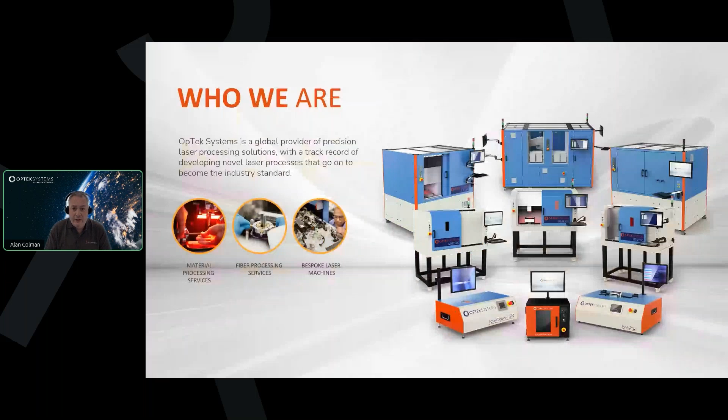As always, let me give you a quick overview of OpTek for anyone joining us for the first time. We are a global provider of precision laser processing solutions, headquartered in Abingdon, Oxfordshire, with international operations in Greenville, South Carolina, Boston, and Dongguan, China. Abingdon is where our machine builds, micromachining, and R&D activity is centered, and Greenville is home to our fiber center of excellence. Out of Abingdon, we develop and deliver custom laser processors and systems capable of machining a remarkable breadth of materials: ceramics, polymers, delicate organics, and much more. If a material can be machined, there's a good chance we have done it.

Our origins are in optical fiber processing, end-face machining, cladding removal, and precision tasks that improve yield and optical performance. But our capabilities now span way beyond that. We support customers across the full life cycle of laser processing, from early R&D and prototyping right through to fully automated production systems. Working routinely at sub 300 micron feature sizes, our systems range from compact desktop units to multi-ton, multi-laser 5-axis platforms. The largest we've built weighs several tons and achieves sub-micron precision.

Our Greenville site serves as the fiber center of excellence, focused on advanced fiber optic processing and assembly: stripping, cleaving, lensing, splicing, and the fabrication and alignment of fiber arrays. We work across telecom, medical, defense, and sensing markets and provide system integration, training, and technical support for our North American customers. As part of the Humanetics Group, we have the financial strength to take on ambitious long-term projects. We hold 9001, 14001 certifications across our sites, and ISO 13485 for medical applications in our UK and China facilities, reflecting our ongoing commitment to quality and sustainability.

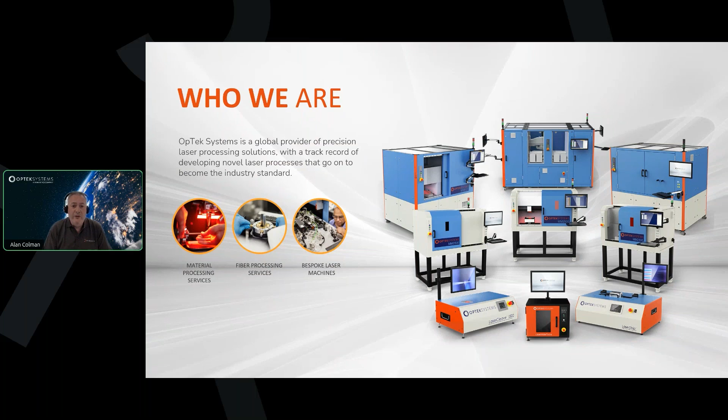Thank you, Alan. So a little bit about myself before we really get into the meat of today's discussion. As Alan introduced me, my name is Andrew. I'm an applications engineer at OpTek Systems here in Greenville, South Carolina. I got my start here specifically at OpTek in 2022. However, I've been pretty deep-rooted into the laser machining industry for a while now, making my start originally with Clemson University's laser laboratories. I've been working here with OpTek Systems, gaining my knowledge and applying my background and experiences in order to serve the biomedical, communications, aerospace, and defense industries, as well as many other industrial sectors throughout the world.

The main thing that we want to start today is really to first introduce our challenge. The main thing that we're looking at is contact-based mechanical milling, especially at the micron scale. This obviously, with anything, but specifically on this topic, introduces a lot of challenges. A lot of the drilling and milling bits at the micron scale tend to wear out very fast and are very susceptible to deformation and wear, and they often break even with regular trained use.

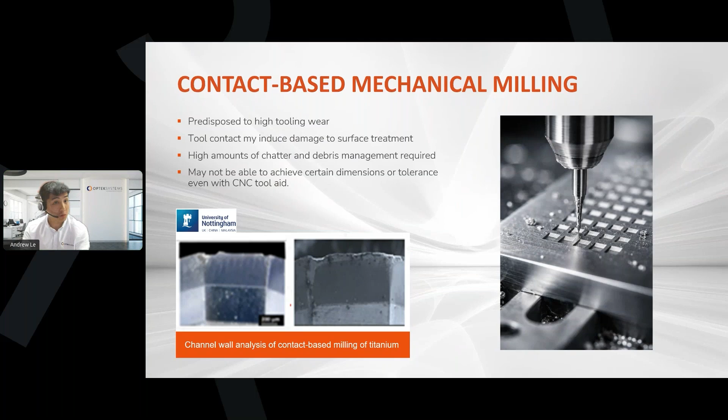Which pretty much moves us straight into our primary topic for the day: laser machining of hardened, be it inherent or surface treated, materials. Micromachining with lasers specifically has many advantages, especially as it relates to high Shore hardness rated materials. It's entirely light energy based, which means it's entirely contact free. The use of galvanometric mirror systems means we have high speed, high volume output of our working materials and conditions.

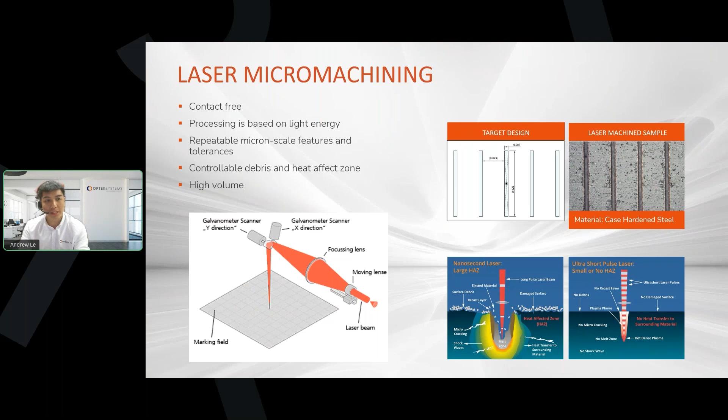For our first example of a real-world application of laser micromachining for hardened materials, we're looking at a gas pneumatic bearing or hydrodynamic bearing. These systems are usually made up, in this case, of shafts of molybdenum, but also titanium and case-hardened steel. Often these systems require very specific machining with very high, low tolerance requirements for the patterns and groovings. This means they have to be repeatedly produced, and we have to make sure we're doing it as consistently and verifiably as possible.

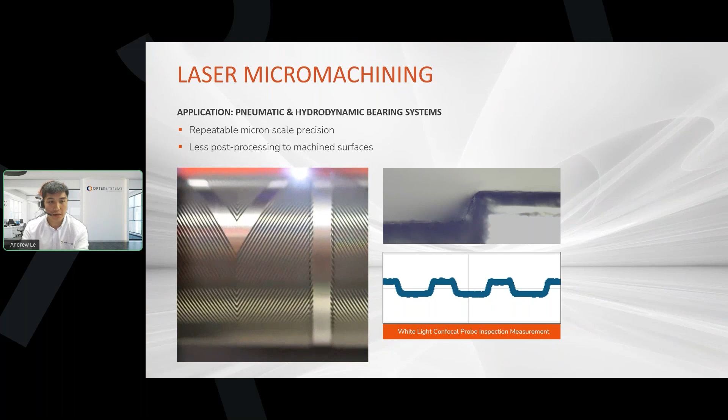What we see here is that OpTek's laser applications labs are able to integrate coordinated motion systems. In this case, both linear drive systems and rotary systems in combination with our galvanometric scanners. This gets us a high amount of controllability with what we're marking, as well as the ability, as we can see in the bottom right corner, to use inspection tools to verify and certify the quality of our work.

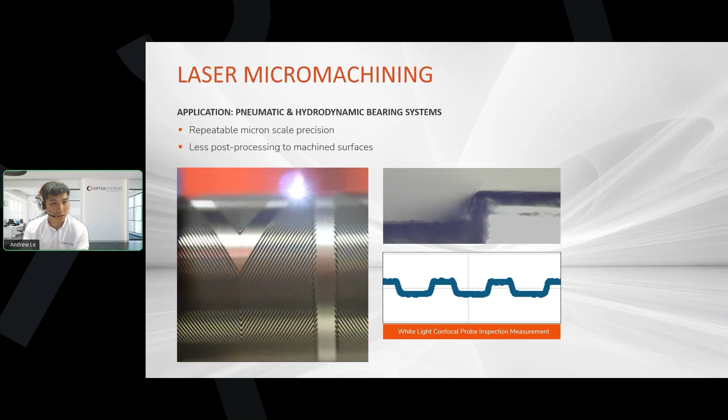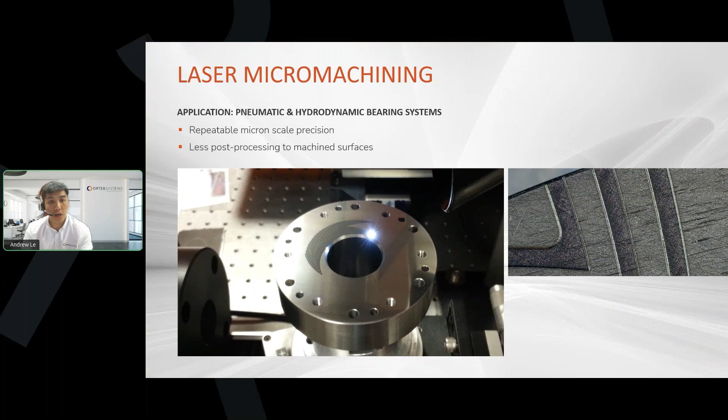Another example of this same topic is that with a lot of these pneumatic bearing systems, many have very specifically treated surfaces with high amounts of polish or with surface treatments. This means we have to minimize the amount of post-processing done in order to preserve those treatments and qualities. OpTek's laser applications labs preserve this by the simple fact that with laser micromachining, we're able to produce features that are nearly ready to go to work right off the laser. This means there's less post-processing treatment that has to be performed, which could compromise the engraved features on these workpieces.

Another application we're going to talk about for these types of materials is medical applications. A lot of medical applications require that components be designed and produced with low amounts of burr and debris, as a lot of these materials may be compatible with biological environments on a large scale and on the tool scale, but fragments and debris are less than desirable in these environments.

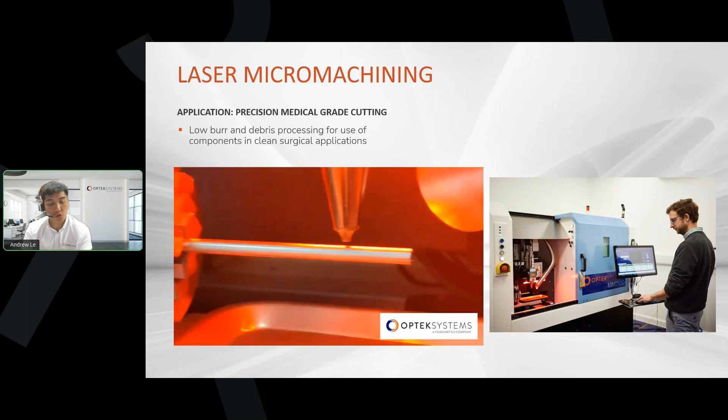As previously mentioned, ablation-based machining gets us that quality where we're able to have hyper amounts of control over our debris, and it is highly manageable for us.

Another example of one of the really strong advantages of laser ablation, especially in how OpTek systems is able to make different systems work together in collaboration, is with helical probe tubes. These probe tubes have an outer diameter of about 90 microns and an inner diameter of about 80 microns. These are very susceptible components to deformation, even minor deformation from contact-based solutions, which makes a contact-based milling solution impractical or quite simply not possible.

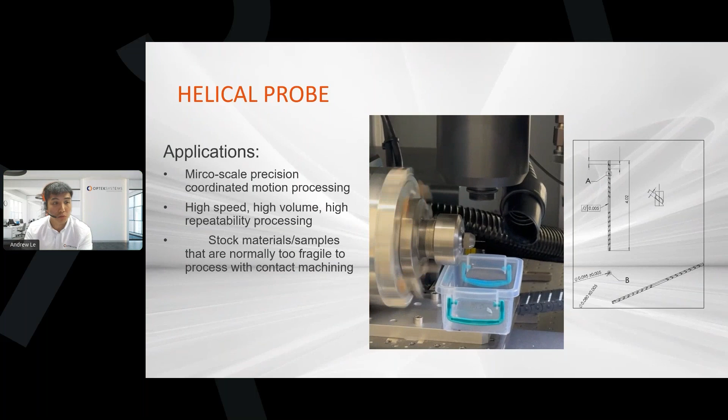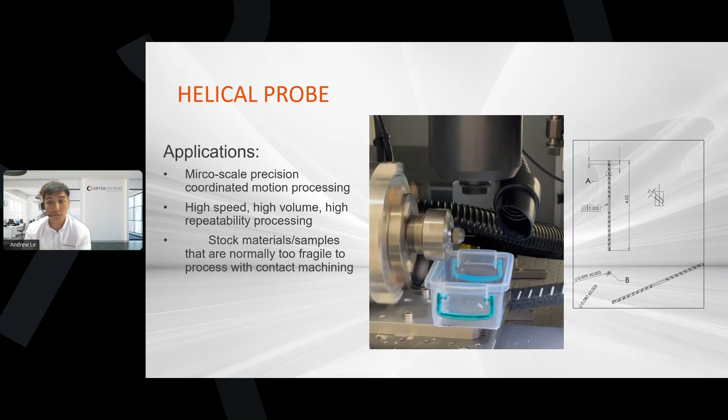With laser-based machining, we're able to get micron scale precision while doing coordinated high-speed motion with high repeatability and verifiable quality. This isn't to say that OpTek is unable to do work with classic contact-based machining. Quite the contrary, actually.

Our research laboratories, as well as our system integrators, are able to do what we call laser-assisted machining. This is our ability to integrate our experience with laser systems with our knowledge and experience with traditional contact-based milling. What we see here is a partnership we did with the University of Nottingham and Peterborough Medical, where we're processing titanium silicon carbide matrix materials, which alone with laser machining would work, but would be very time intensive to do this processing.

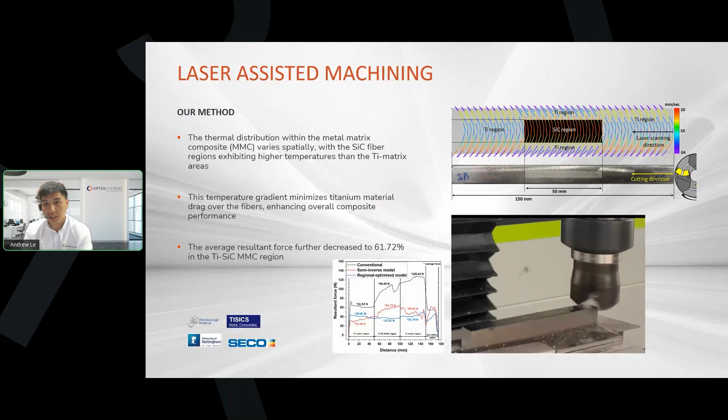But at the same time, if we were to use only exclusively contact-based milling, we may not be getting the quality we're looking for. In collaboration of these two ideas, we're able to actually get a process that both gets us the quality we're looking for, as well as the time performance that is desirable in a large-scale manufacturing environment.

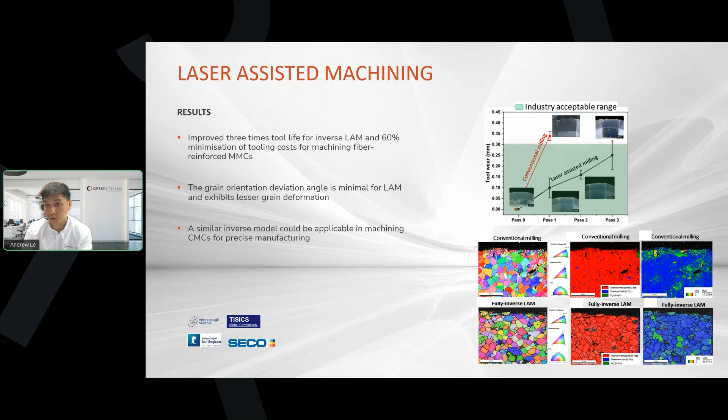As I mentioned before, we have systems and capabilities not only to perform all of these laser-assisted machining capabilities, but our laboratories also have the ability to verify our quality and consistently prove it. We're able to monitor our quality down to the metallic grain, which we can compare. This is what it looks like when we machine a workpiece with only contact-based solutions versus when we use laser-assisted milling solutions, and we're able to achieve the uniformity we're targeting, as well as the dimensional quality and tolerance set up in our designs.

Something to really understand is that a lot of these materials have high shore hardness and are very difficult to work with. A lot of our previous examples have shown work done on the micron scale, even at high volume. That isn't to say OpTek isn't capable of high volume procedures on large scan areas as well. Here we have a webbing matrix that we're machining with our laser systems, able to produce results at quantities up to 30 meters per minute. These are systems that both our research laboratories and system integrator teams use to generate processes highly tuned to our customers' needs.

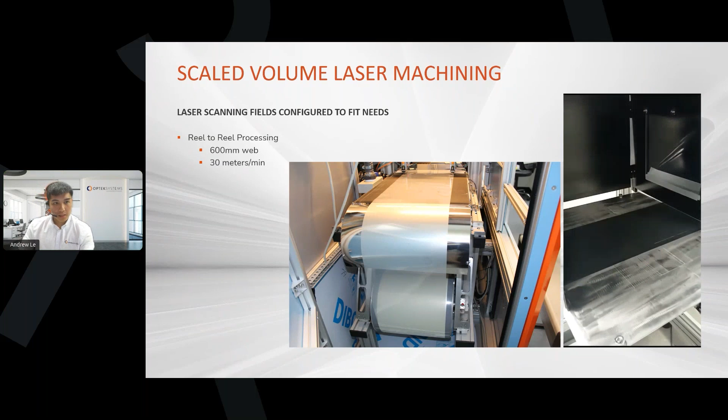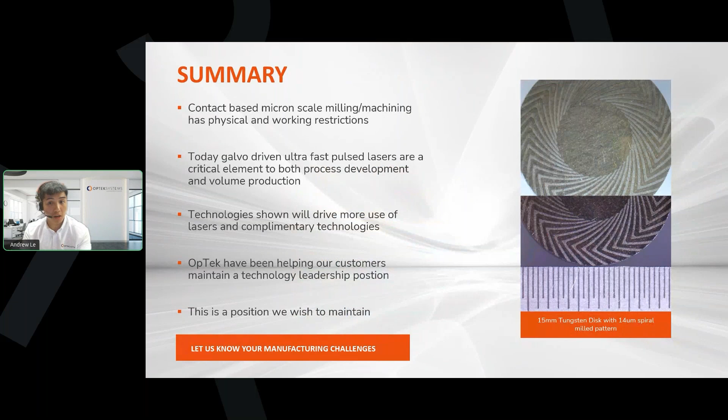So to cover a summary of what we've covered, since I've covered a lot of content in a short amount of time: the main thing I want to hammer home is that a lot of systems, especially in the modern day, require high shore hardness materials, either through inherent alloys or surface treatments. There are a lot of challenges machining and working these materials because of this, and as a result, it's not always practical to use traditional milling solutions.

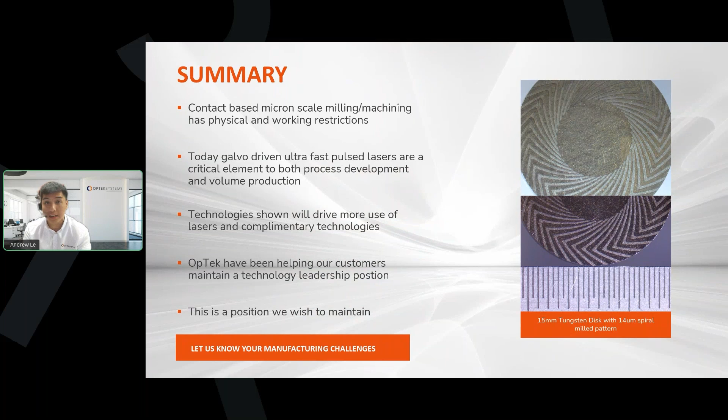With today's galvo-driven ultra-fast pulse laser systems, we're able to do process development, system integration, and volume production, whether in-house in our laboratories in Greenville, Abington, or Chelmsford, Massachusetts, or by building tailored systems for our customers' own workplaces. A lot of these technologies are driving us forward, both in laser technology and the future of manufacturing in general. This is something OpTek continues to support, both with our research partners and our customers, to ensure we're at the forefront of this capability, whether it's the oil industry, aerospace industry, or medical industry. OpTek is there at every step to ensure anything is possible with the right mindset.

So we've covered a lot of materials, but now we're going to pause and do a Q&A with Alan to see if there are any questions that have come up during our presentation.